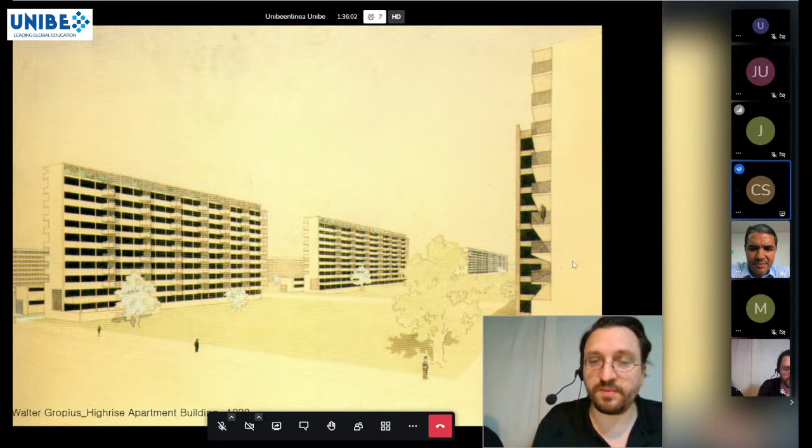I feel like it's a more functioning democracy than actually in Europe, where we're now running into problems a little bit. And basically modernism kind of won in Seoul. This thing you have on massive scales, like 60% is living in this environment.

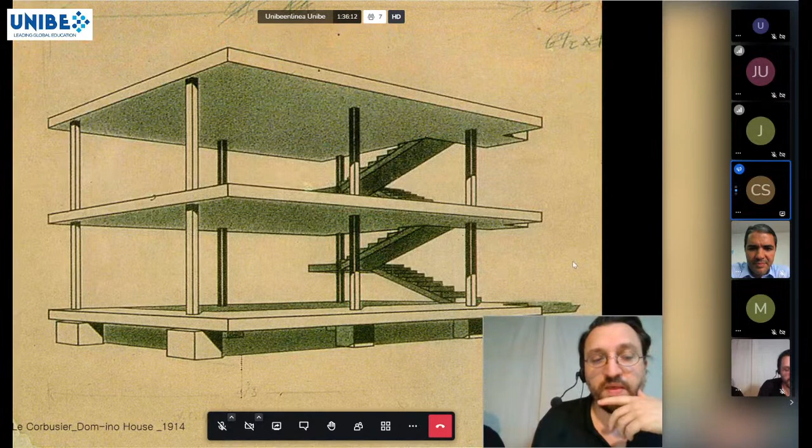Then the other prototype for modernism, Le Corbusier — in Seoul, these 4 to 5 story buildings are based on the Dom-ino idea in a clarity that we hardly have in Europe. This building system is so simple and so efficient, and everything in Seoul is about efficiency, speed, building quickly, tearing it away again, building again new.

And this is for me a typical scenario, like there's a Le Corbusier in front of a Walter Gropius, and the whole city is basically based on this concept.

And we want to quickly read a short text on how we perceive the city to explain what makes it so extreme. We call it a love letter to Seoul, because Seoul is so absurd that you either love it or hate it, and we got to love it in its absurdity.

Designing and discussing architecture in Korea uses the same terminology as it's used in the global discourse. But looking closer, these terms have a very specific and far more radical meaning in the Korean context than their Western implications. Put in other words, what we know has no relevance in Seoul.

It is detached from the building itself. The value of the building, in contrast to the value of the land, is so low that it has no influence on its very right to exist. A small plot costs $1 million US dollars, but the building that is built on it costs maybe 200,000 US dollars.

The quality of space becomes not a question of relation between different spaces, but an abstract idea of space in relation to itself. So space is only concentrated on itself in a building, in an object, never in relation to the street or to the next building or to a notion of public space.

This is for us a very typical scene: basically all interiors in Seoul disconnect themselves from the outside through these screens, and form.

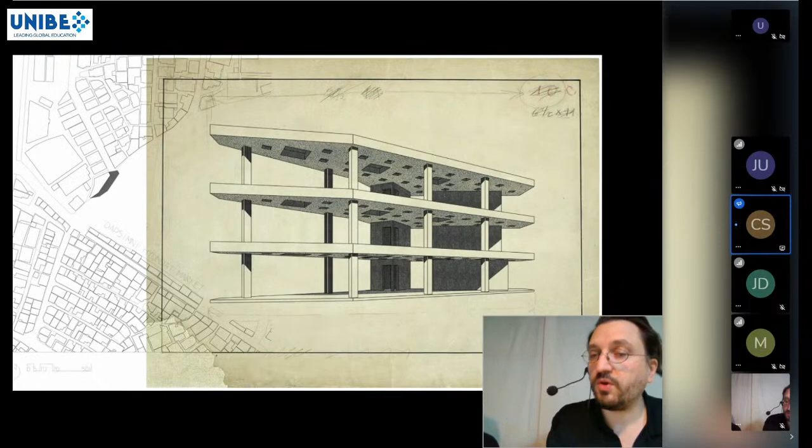So we are basically working in this little dot on the lower right - we are working deep in the unself-consciousness of Seoul. I want to show some quick examples of how we react to this, to this impossibility to actually do architecture here - like a neighborhood facility building where we really go on the Dom-ino house, that is just an empty structure that then can fill in whatever happens. Whoever wants to, whoever will rent it, will actually build their own shop or will build their own office in it.

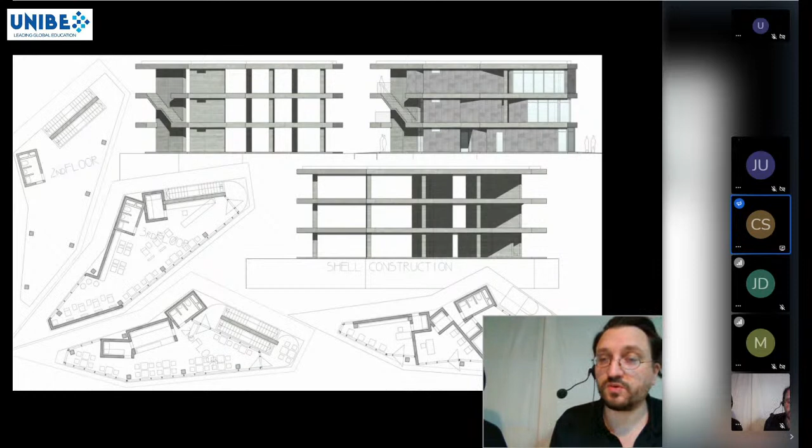So really empty shells that then basically are programmed to whoever is renting it. And a shop lasts basically in Seoul like 3 years. Then a new shop comes and then everything is changed again. And therefore we reduce basically just to a structural frame, or a competition for a kindergarten in this apartment complex context.

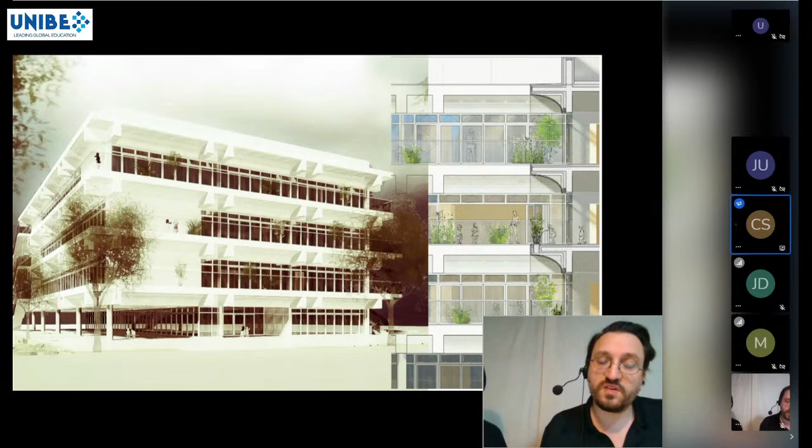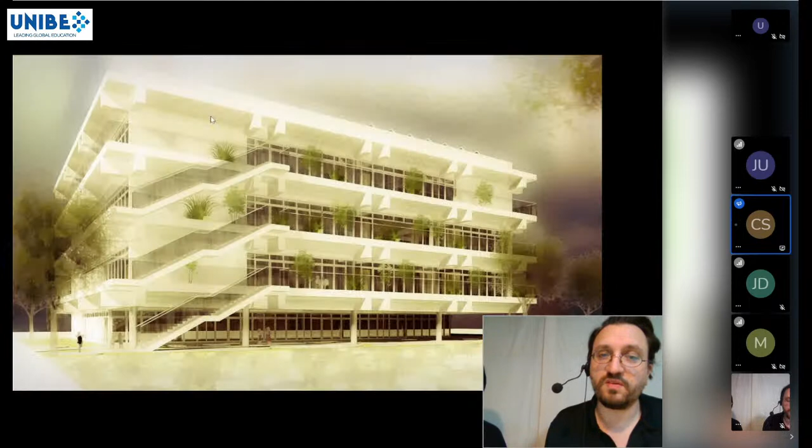In this generic city, where the program is highly compressed, we try to find principles so that the functional zones still have the largest possible space to breathe in that sense, but from the outside it looks completely generic - with the hope that it will grow over time and actually excludes itself again from this generic communication in the city.

Very often we are confronted with really low income housing, where we then have to get inventive.

This building was usually a single family house, costing like $300,000 in Seoul to build. We had to manage for our clients to build it for $90,000, where you then have to become inventive, and then the house will only be used for 10 or 15 years.

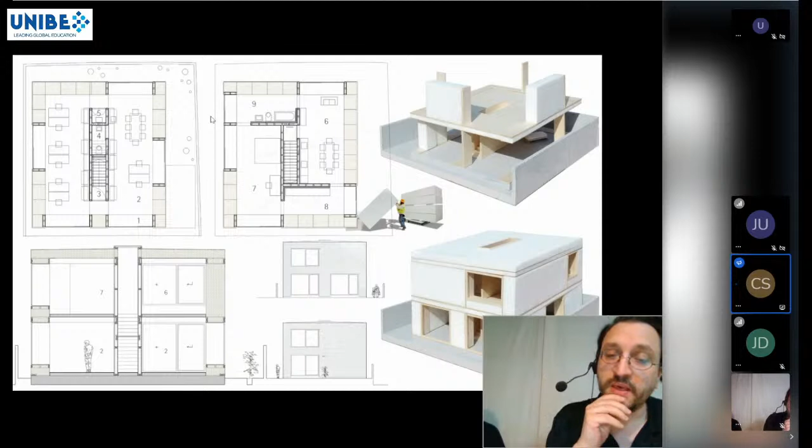So this was built on the principle to actually use structural EPS, structural insulation that is used for under-road construction, underneath roads. So the whole structure system is actually just an insulation block that forms the entire structure system.

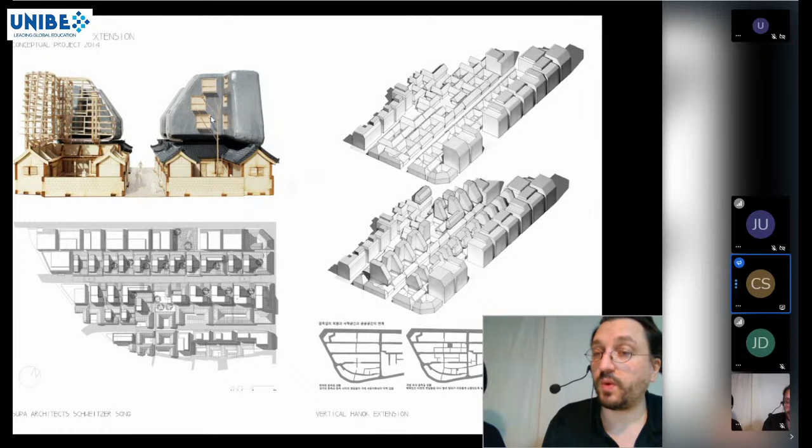Other reactions deal with these Hanok neighborhoods, the traditional Korean houses that are disappearing at an alarming rate because they are not monument protected or anything. So they're just disappearing, replaced by gated apartment communities, where we tried to develop systems that can adapt to the spatial needs, because they are taken away and a 4-story building is built on the site, or the whole area is taken away and an apartment complex is built onto it. Like systems that can actually plug into this Hanok and extend it, and therefore give an incentive to actually preserve it for the city.

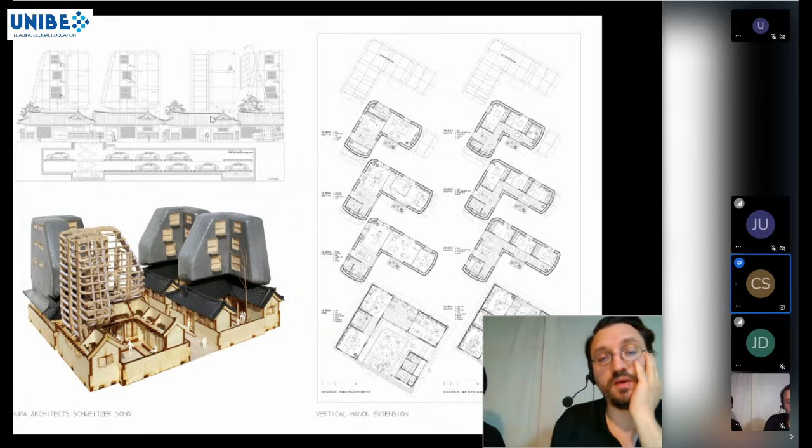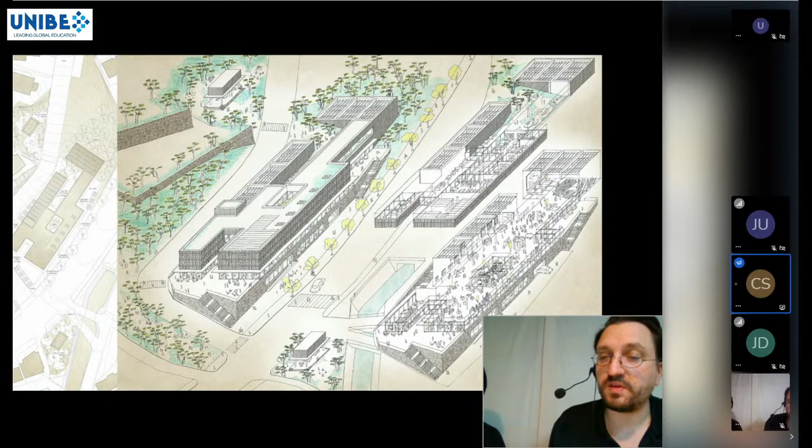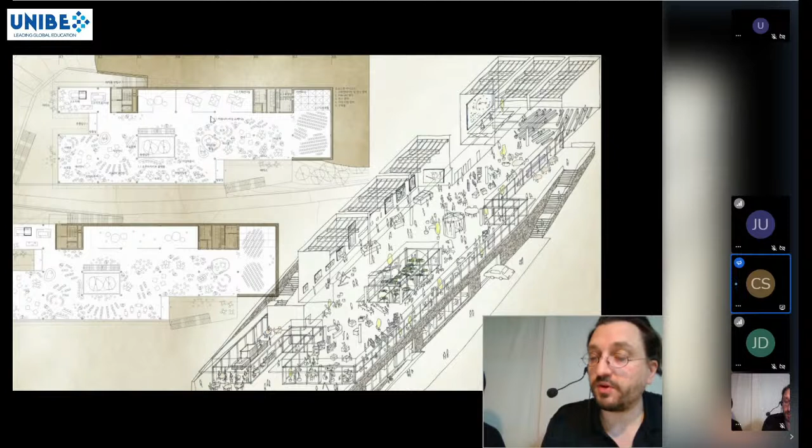With understreet parking systems, cultural centers that stay completely undetermined, that just give space to let happen whatever will happen, because we know in 5 years something very different will happen. So if we now define very precisely which function is where, in 10 years it cannot be used anymore. Basically a culture center that is just one big open space where auditoriums can plug in and exhibition spaces can plug in, and the whole activities within the space can change.

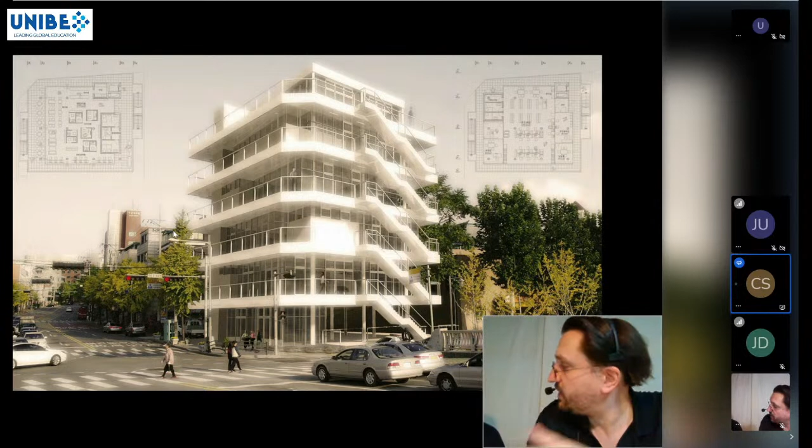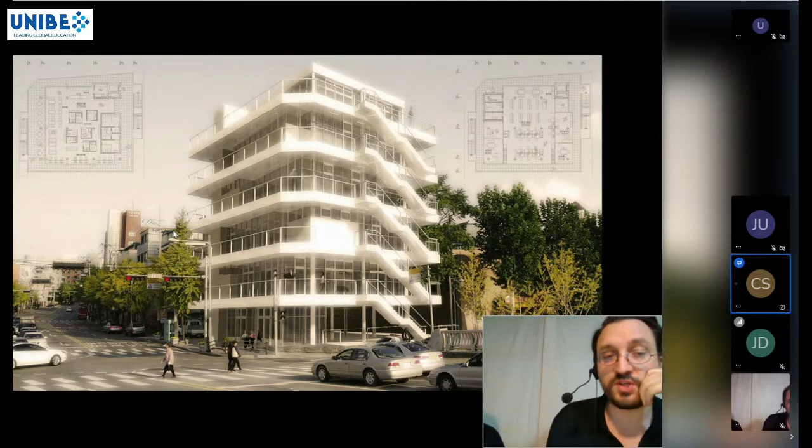This is called community neighborhood, community centers, community neighborhood centers, where again we tried to invert the building, so it becomes the Peter and Alison Smithson's street in the sky, where the street is basically brought up into a building, where the functions can exchange and still work and operate with this constant change. We are big fans of Team 10 and Peter and Alison Smithson, and therefore we mostly work in these very local small communities and neighborhoods, taking a lot from their philosophy on how to view a city, to see a city on its different scales, and to try to connect these different scales.

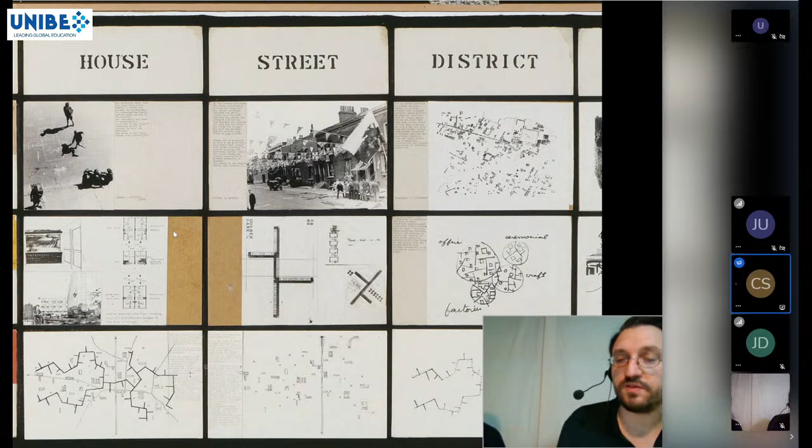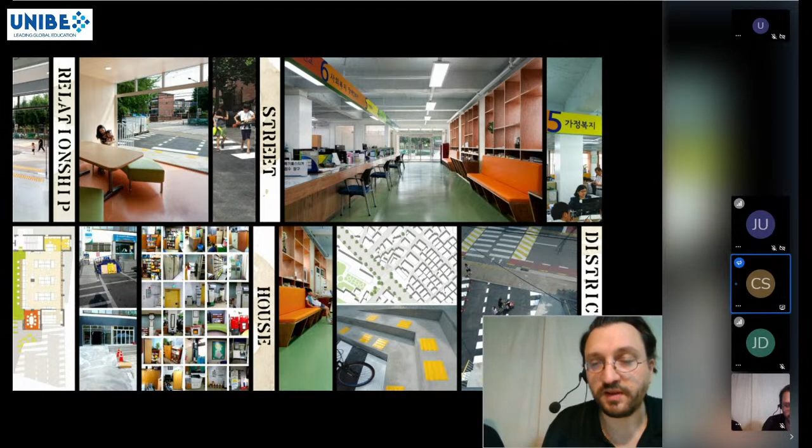This is a renovation of one of these neighborhood community centers that are really vibrant and really important for these local communities. They were basically built mostly in the 1970s. Again, a modernistic block just put here.

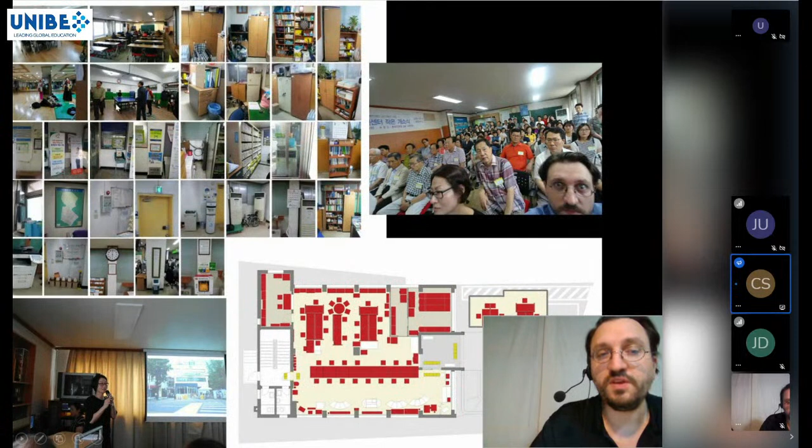On the ground floor, you can get your birth certificate there. If you need any official document, you can get it there. In the basement, they have senior activities like table tennis for senior citizens. On the second floor they have a lecture room and a library, where pupils can come and do their homework. Then on the third floor they have community spaces where they do traditional dancing or yoga classes and these kinds of things.

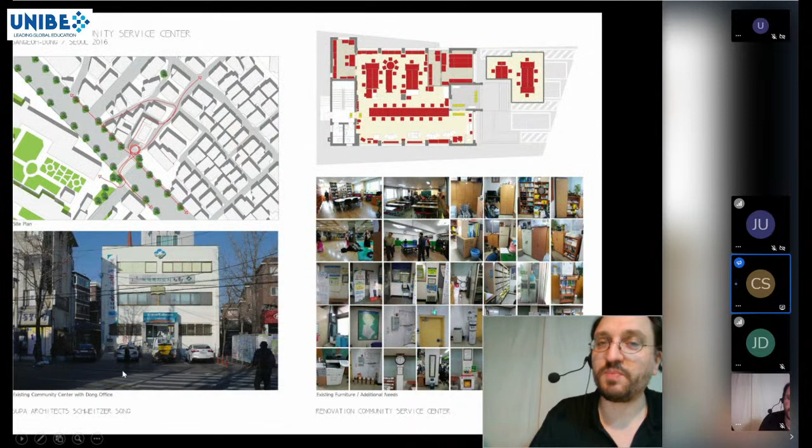So they are highly essential. They look really bad, really bad, but they are highly essential, and they are in dire need of renovation. But then for these kinds of tasks, there is no budget, and we love to do these kinds of projects because there is no budget for it.

But there we can work very closely with the local community. This is a photograph from one of these community meetings, where everybody comes, everybody wants to know what happens with their community space, and they give a lot of input.

In this case, the task was basically: you enter here through the windbreak, then here's the service area where you get your documents, then you go back into the staircase where you go up or down to the community functions, and then there's the back entrance.

Through long discussions with the locals to understand their community needs, because every community center has different needs, we mapped what they all have. Basically everything that is red they want to keep, they still need. But then the task is to add this program into here, and you see, how can you add this? There is no space anymore for it.

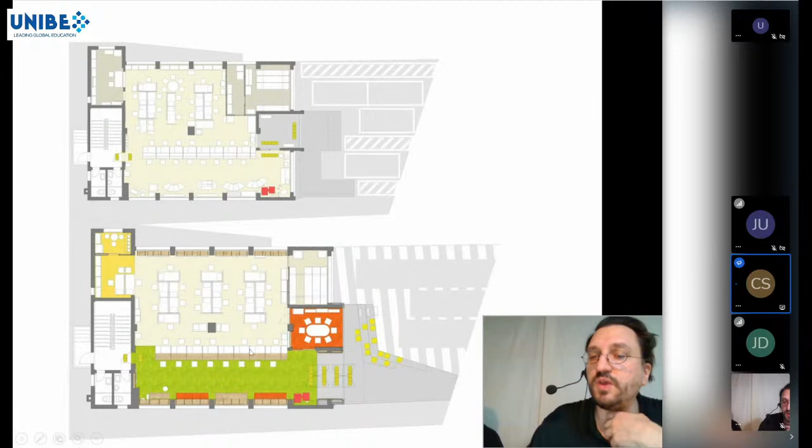Everything is an object with this strict boundary, expanding to the public space. You see the new established relationship between an outside community space and inside community space, the ramp that goes in.

This is now basically linking this object that is very defensive, linking it to the city, opening it up to the possibility to extend to the outside, and therefore also taking the pressure from the inside of the building a little bit outside.

You see how it works extremely beautifully, how they discovered their outside space, and now do neighborhood festivals outside, using this little stage towards the community space for extended communication.

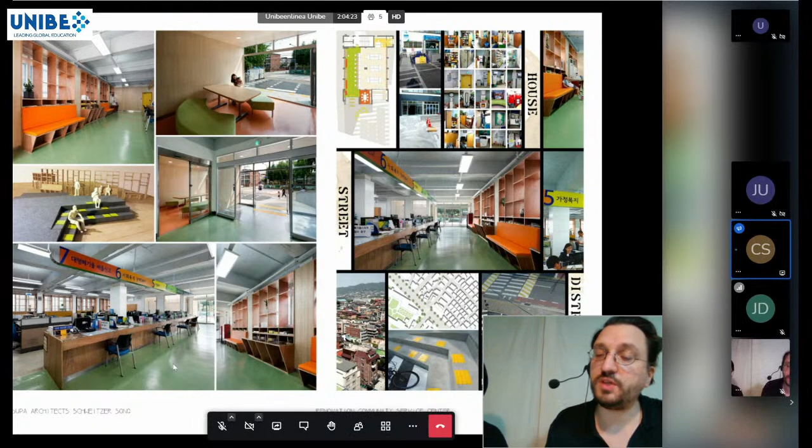Also inside, to provide shelves where they can put all the stuff these community centers need inside, but almost no structural change, almost no design—trying again, very low budget, just reorganizing the necessity of the local community and strengthening it to make it possible to happen.

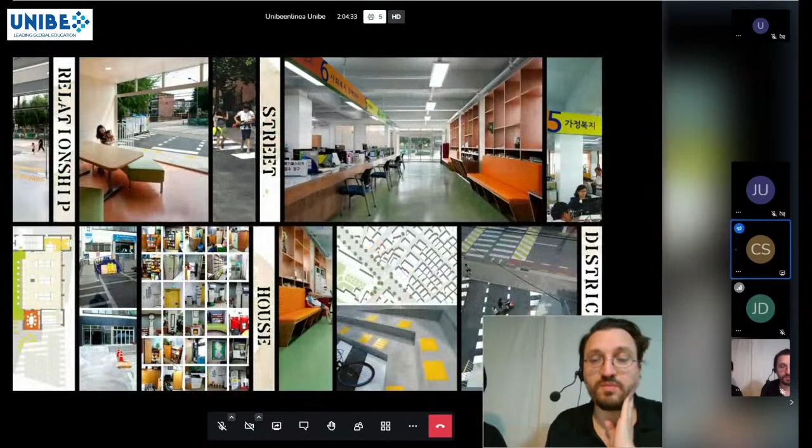These are some photos, some images.

To show another example of what we learned, or had to learn quite drastically: as architects we design a building. We have a client, the client has certain needs and wishes, so we come up with ideas.

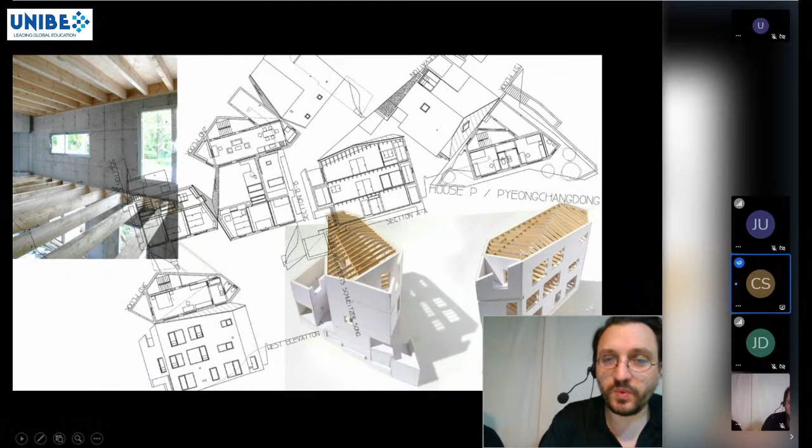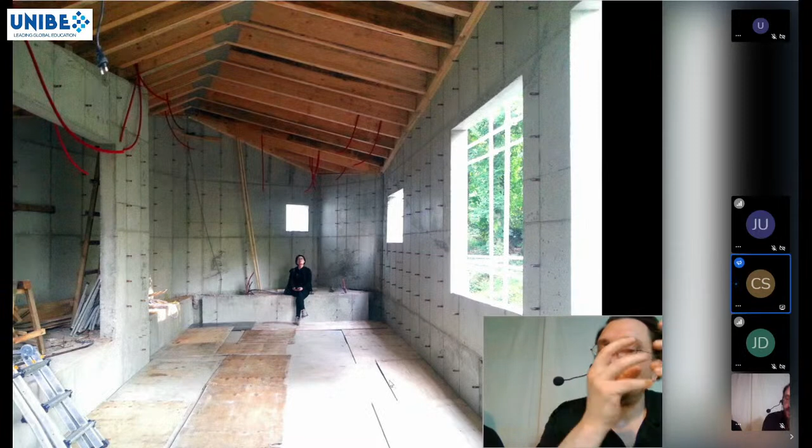We as architects dream up, we communicate through models—this is a structure model that we built. We draw plans, we make details, but how do we actually know that what we design then works?

This translation of the design idea into reality—there comes a moment on the construction site when suddenly the space emerges, when suddenly this is the first time we actually see that what we planned might work, that it might be a good building or not. It takes quite a long time to reach this point.

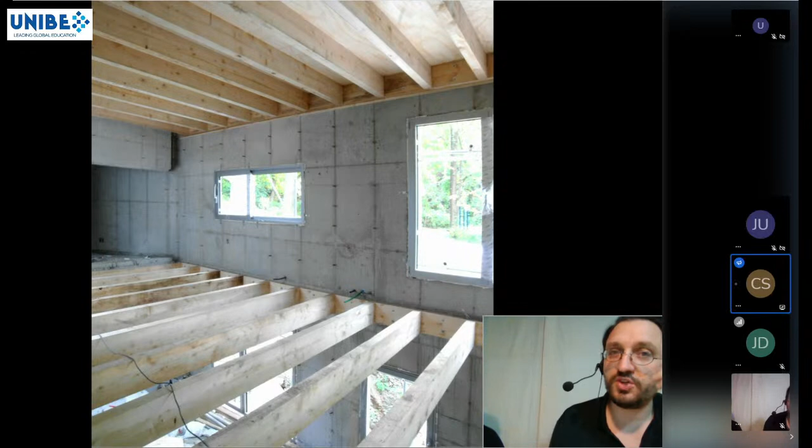Again, the cheapest way to build in Seoul is concrete. Brick is much more expensive than concrete, wood is very much expensive, concrete is the cheapest way of building. So again, with a low budget, it's a concrete structure, but at least we try to bring in wood, material that makes a house a little bit more lively through the roof and the floors.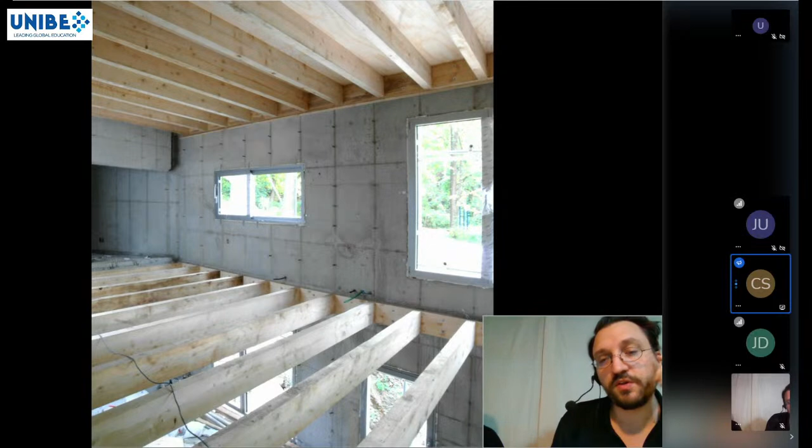Then the architectural photographer comes, somebody else comes and documents your work. You see here the 1960s, 1950s houses that are now taken away and replaced with newer, higher houses. It's actually a quite beautiful site with a lot of forest around.

For these kinds of buildings, it became very unimportant for us to do anything that represents, that says 'I'm a single family house' or 'talking architecture,' because it's just not necessary for architecture to have an identity. It's almost like the famous novel from the Austrian author Robert Musil, the man without qualities—we started to build houses without character that deliberately try to have no character.

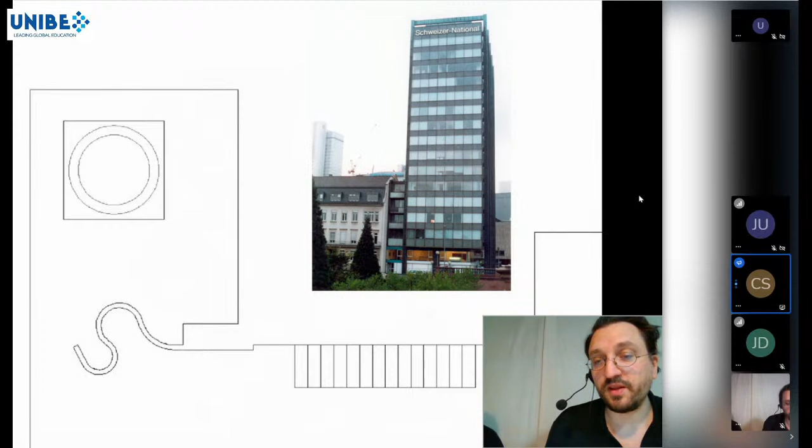To quickly show, this was our very first project, in 2000, when we graduated from university—it was an office renovation on the second floor of this high-rise building.

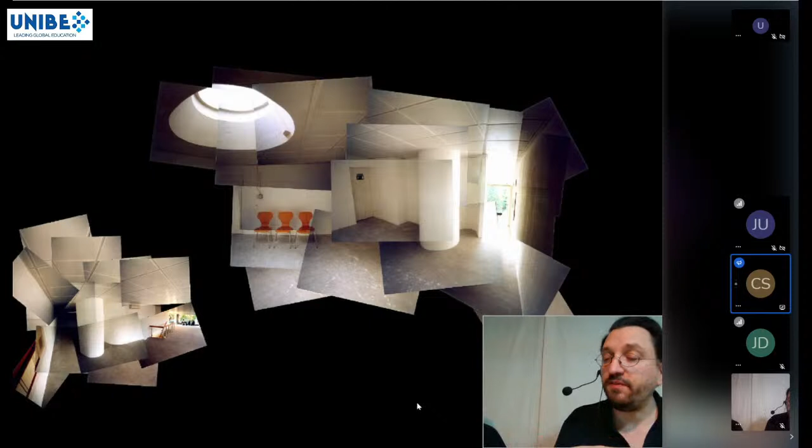Basically, we just had to build a wall from the office to the tea kitchen, and we built this strange wall here, where then the architectural photographer comes and makes this image, and that freezes the architecture into an object, while we prefer to look at it this way, that you see the relationship between the intervention and the space, where you feel a notion that it's not about the wall, it's about what the wall might influence, how people use the office, or how this might influence your behavior within this tea kitchen and office space.

And therefore, we ask an artist to take photos of our building. A different view, not this curated view of the architectural photographer, but somebody who doesn't want to represent the building.

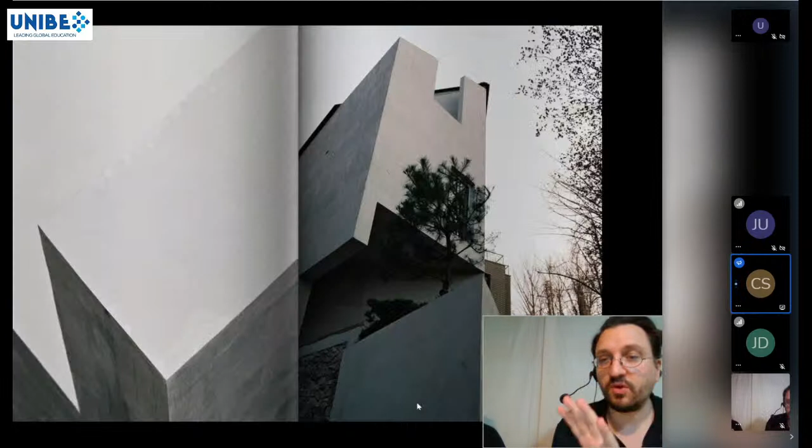His name is Hee-chon Kim. He's meanwhile a quite famous media artist in Korea. He expresses his art through film and through photography. And he made these images that are zoomed in, that look at details, that don't show the object, but that show the spaces, and maybe also the absurd spaces and the unusable spaces, and how the building relates to the outside, the reflection of the outside within the building.

And we like these photos much more. For us, they represent more what we are trying to achieve, that the house becomes a place to live, and becomes a canvas for your life, where how it looks like doesn't matter anymore, but it has to have the ability to allow life in it, like these strange incidences in the house, and for us this much more represents the essence of what architecture has to do. Since then we let our photos be taken by artists, not by architectural photographers.

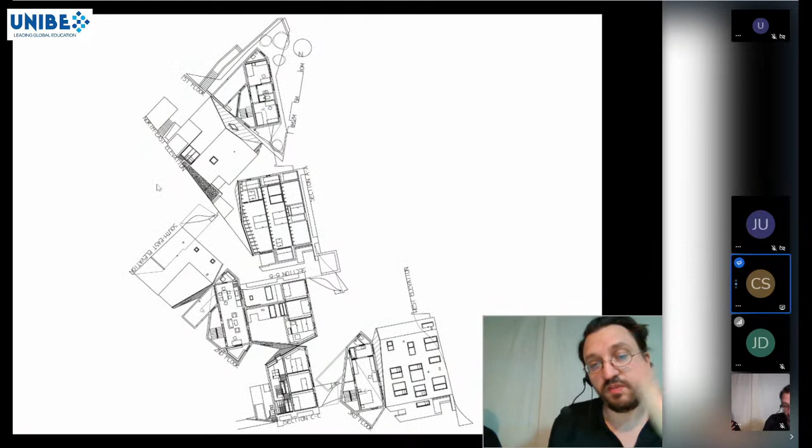Like we trust this view more to convey a spirit of our buildings. And then in this case, something very interesting happened. The client, the husband, is a journalist, and the wife studied Buddhist philosophy, and she's a writer. She has a blog where she writes articles and reads books and does book discussions and so on. And on her blog, she then started to publish photos that were taken in this house.

These are the execution drawings of this project, like 105 pages of plans, and for us architects, this is actually the most time we spend on. We look at it day in, day out. We never see the space until it's realized. So how do we know whether our design can achieve becoming a home?

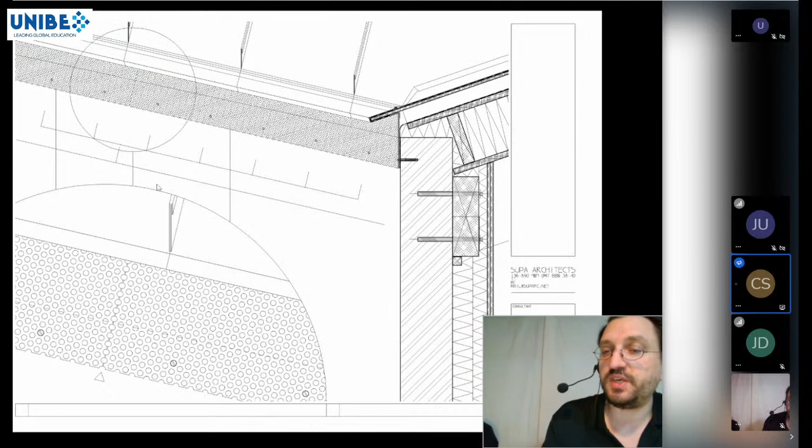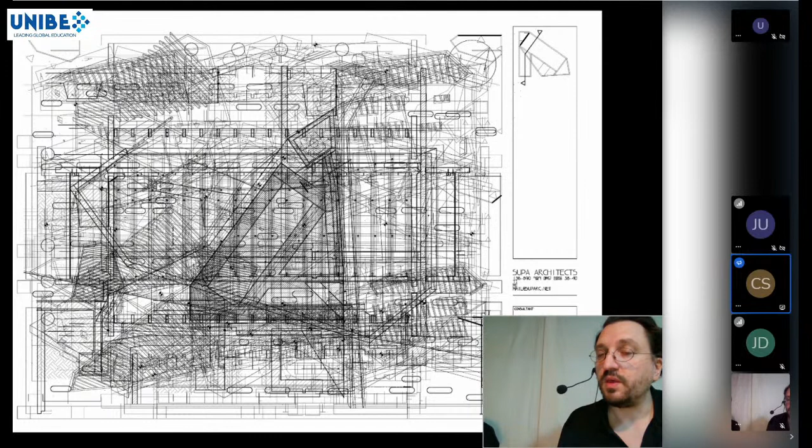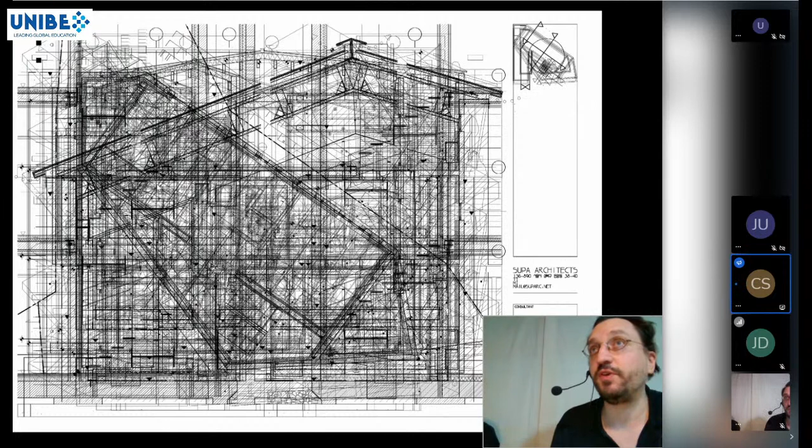That can achieve that life can happen in it. For us, we started to overlap our execution drawings to see how complex our design is, to test whether our design is too simple. If it reaches a certain level of complexity, we know we've reached a point where it's still a simple design, but it will allow a lot of different kinds of use, and adapt to the user and the changing life of a user, when the children move out, when one grows old.

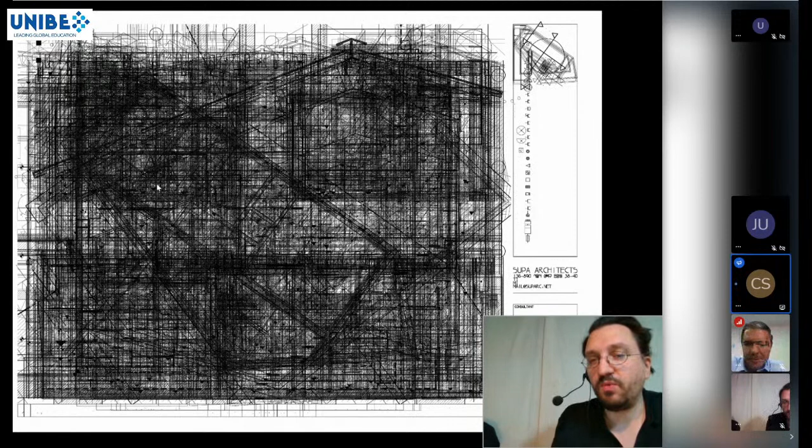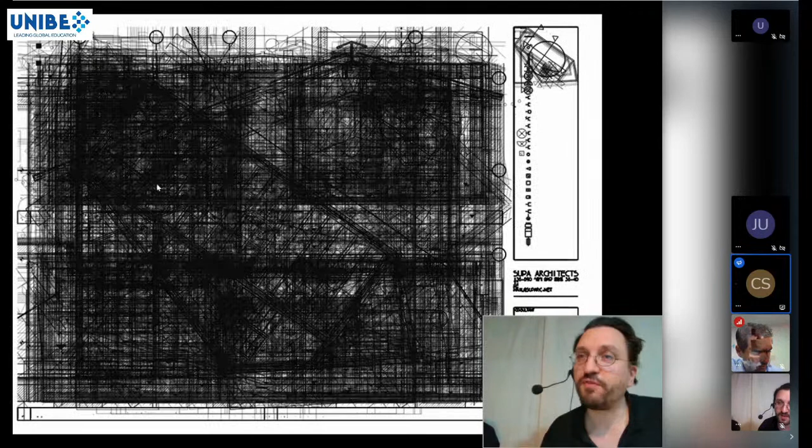So these are, let me jump to this: the overlap of all 105 plans, where you cannot really read anymore what the house design is, but we know for ourselves, if our execution drawing reaches this complexity, the house will be good. It became a different kind of language. You see it here animated. I hope the frame rate is quick enough - probably not - showing how this execution drawing densifies more and more.

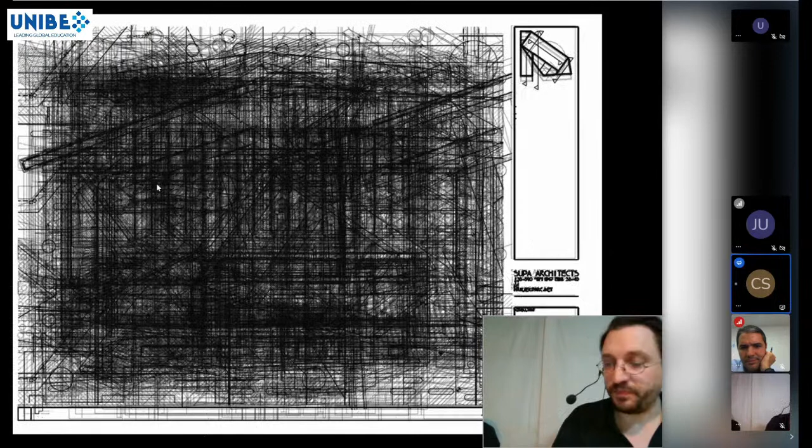And this became for us a principle, basically, to test whether architecture is successful or not.

Now my question would be, how much time have I got left? Can you give me 10 more minutes? Then I would talk a little bit about the Venice Biennale, or shall we? Yeah, sure. I personally am delighted to be part of this conversation and to learn everything you are sharing with us, so please serve yourself. Okay, then give me 10 more minutes please. I know we are already at 1 hour.

I wanted to, because this is now what kept us busy for 1.5 years - this damn Venice Biennale that was delayed 2 times - so this is our most recent project in that sense.

I think the Dominican Republic is represented at the Venice Biennale with Lydia Leon, who made these very beautiful collage paintings in this church. It's just breathtakingly beautiful how it looks, with the tobacco leaves, right? I think it's the second time. Oh, it's the second time. Okay.

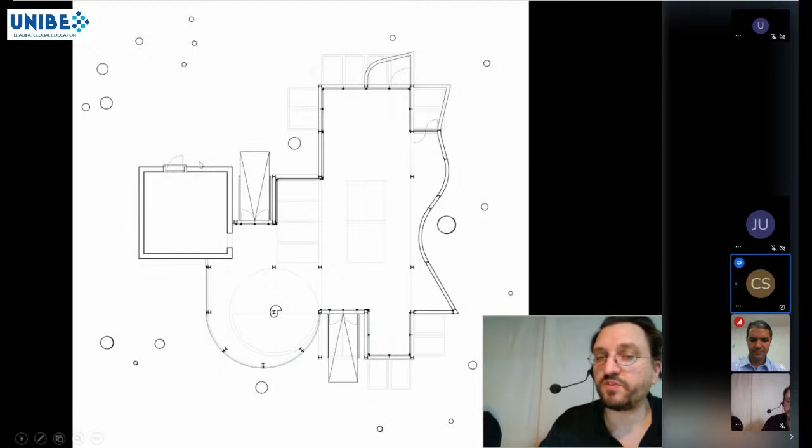Now the task was how to bring a school into this space. What does a school need? This empty space you see on the left is actually an old office, a brick building that later became a public toilet within the Giardini, and the Korean pavilion just docks onto this historic building.

So what makes a school from an architectural infrastructure? In Seoul there are a lot of community spaces where children can do homework, or that you can rent for an hour for a seminar or lecture. Basically all you need for a school is a table, a board, a shelf. In Korea you need air conditioning because it's very humid in summer. Just very basic infrastructure.

But of course we could have just taken all this and shipped it to Venice. Instead we started to look at the essence of architecture, what it takes to come together and discuss things, and we looked at this famous photograph by Manfred Schiedhelm of the Team 10 meeting in Bonnieux, France, where Team 10 met in the shadow of a tree.

You see a stone table with coffee, a natural stone wall. On the left down here, that's actually a building, taken from the second floor. We started to analyze it, cutting out the people to see what makes this space so essential and so simple. What is the mechanism behind it?

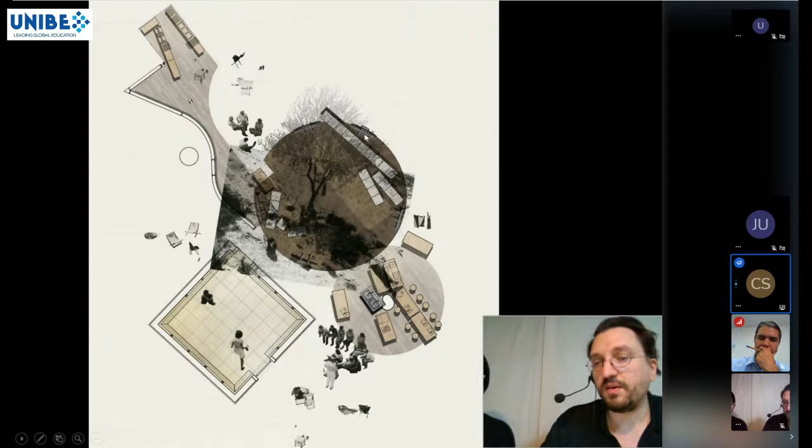This was then our concept collage: for a school we need a gathering space, basically a bench and some chairs we can flexibly arrange for whatever scenario—a lecture, a seminar, whatever it is. Then we establish a kitchen where we can cook and eat together, because food is the most essential social communication tool of all.

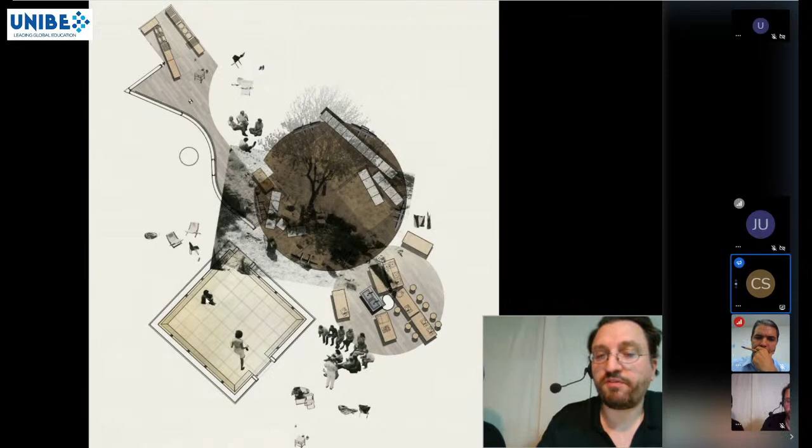Then of course a storage where everything you need can be stored away—you take a table, you store the table away again. And then the house that appears in the photography, just as a small hint. We also wanted a rest space, because when you do the workshop all day, you need a little bit of privacy for 20 minutes and to charge your cell phone.

This is then the pavilion design, with the central gathering space, the workshop area, and storage where you can put the tables—they can go into storage or come out. This is the kitchen, also flexible. On the roof is the toilet. And in the old brick building, we put in a Korean paper floor as the rest space.

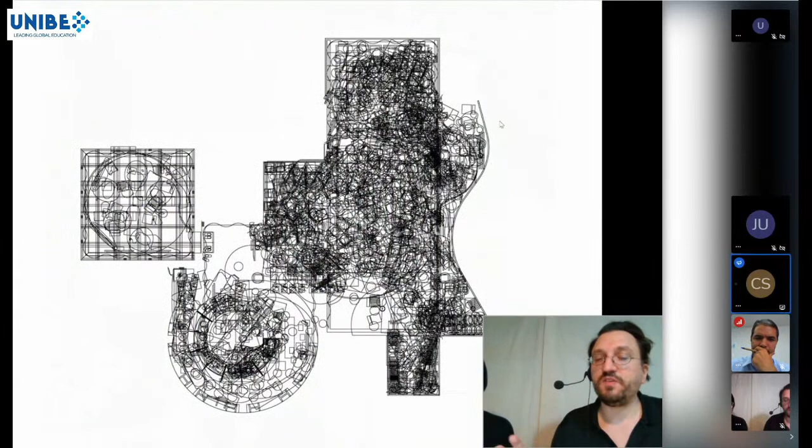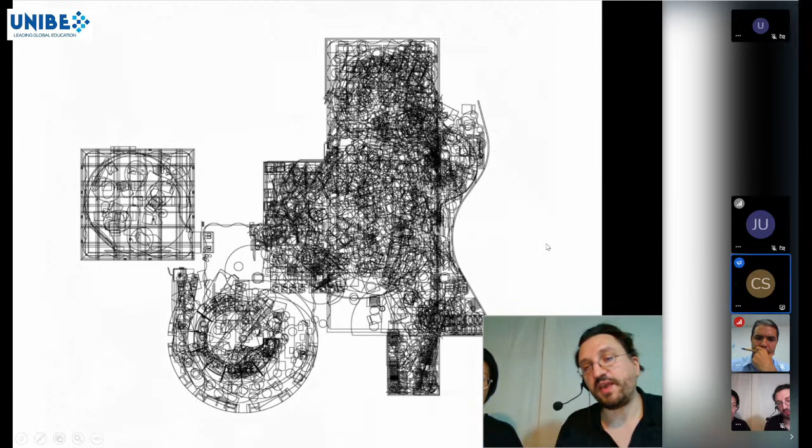But we hate this, because this is now a communication tool frozen in time. We like to show it differently: this is an overlap of all the scenarios we drew, all the possible placements of tables, all the possible arrangements of how the workshop can happen, maybe a seminar in the rest space. For us, this represents the essence of what we are doing—not a frozen moment in time that never looks exactly like this, but how it will actually appear.

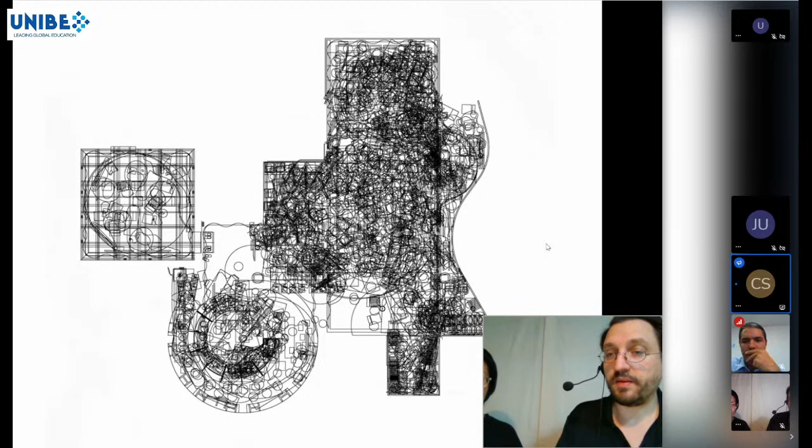If I take all the 6 months together, this is actually the representation of the pavilion, and not this one. And this is now how it turned out.

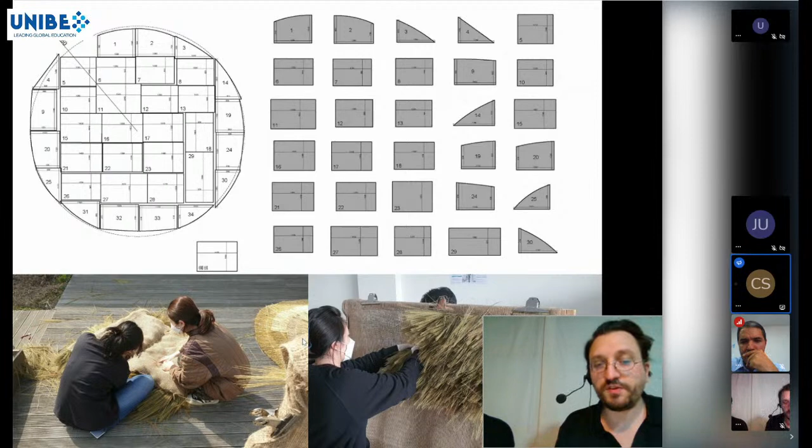Kim Ion, a landscape architect, developed this amazing carpet out of weed, like what traditional Korean brooms are made from, dried weed, that is then woven into a net. This was in the autumn of 2019, when we produced this to send it to Venice. Now it's here within the space.

Then you see the benches. Back here is the workshop area. Because of COVID, the first workshop will happen mid of this month. The first student will come, I think, from London, and do the first workshop there.

So then the place will start to change, and they will rearrange the tables however they need it. Then here in the back, we have a pin-up wall. This was not just for the opening, but whatever the students produce goes here for pin-ups and for discussions. Here on the right is storage where you can put your things.

Our kitchen that is fully operational, very well equipped, very essential in Korea. The rice cooker, to cook rice, and then the paper room with the Korean paper called hanji.

It's a traditional technique, 4 layers of paper, and then varnished with oil stain, soy oil as oil stain. Here you see how they applied the oil stain. It's a very fascinating floor that you only find now in traditional Korean houses, so very seldom. It's not done very often anymore because it has to be redone every year.

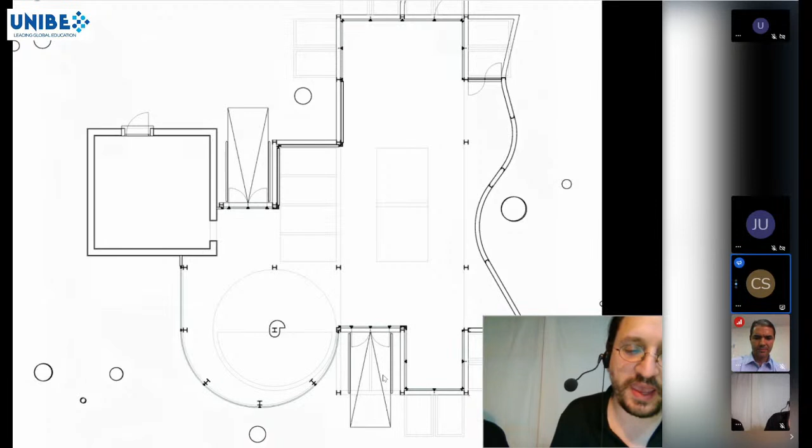So we really like this relationship, because we didn't want to do something to look at. We wanted to do something to use, and therefore the architecture becomes a relationship, a process, a mutual influence, an interaction, a social enabling. Basic functional needs, like a good working environment, adaptable to any given space, adaptable to any scenario of use.

The plasticity is a term that is important for us. The user can influence the space, but the space also influences its use back. It's a dual relationship: the user can change the space, but the space also influences how we use it.

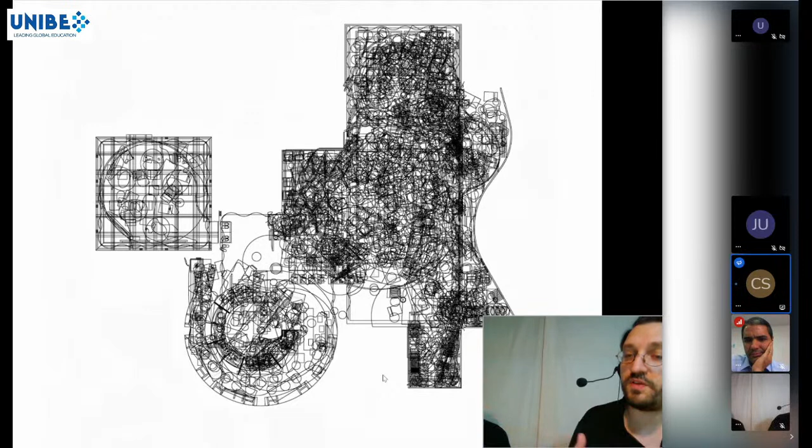All these principles are realized in this scenario, which actually has only one fixed space, the gathering space, the grass carpet. Every other space is unfixed, can change, can evolve. Maybe to close with the future school manifesto that we wrote, which expresses very much what we believe architecture should be or has to do.

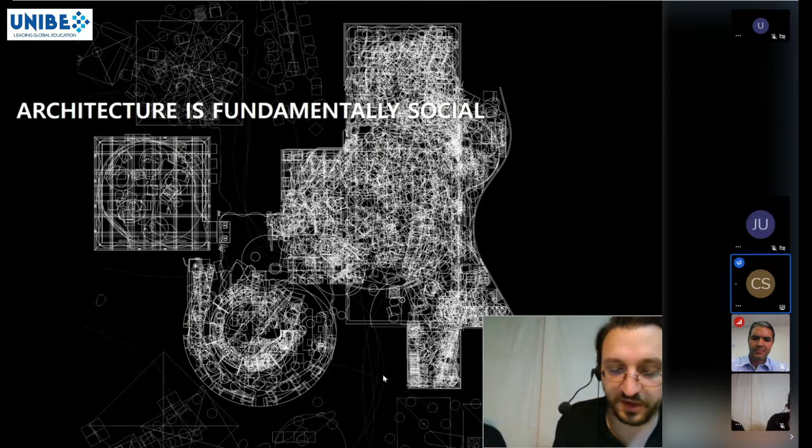Architecture is fundamentally social. Architecture is by us all, for us all. This is a quote taken from Team 10, right? It shapes our lives at every moment of our existence.

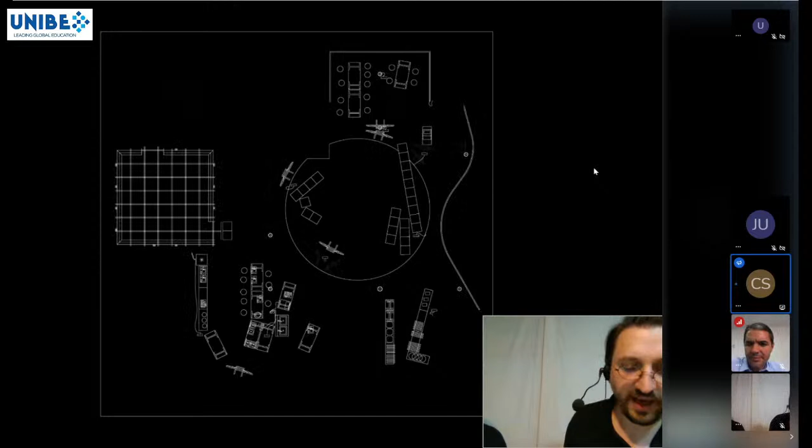Therefore, architecture is not appearance, but content. Architecture is not economic, but humanistic. Architecture is not building design, but social design. Architecture is not object, but relationship. Architecture does not begin nor end with building. Architecture does not exist to function, but to influence. And architecture does not exist to organize, but to provide opportunity.

So we are not organizing space, we try to provide opportunity. Architecture does not exist to serve, but to enable.

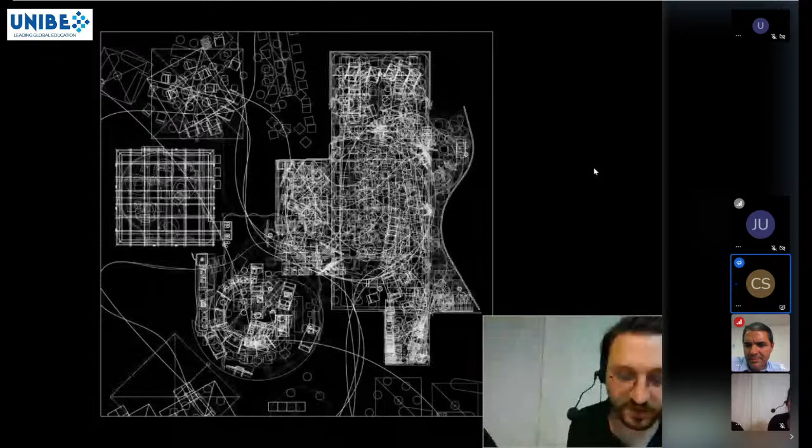Architecture is a cultural act, but architecture is also a political act, and it has to be seen as such to develop its full potential. We have to be aware that we do something political, something social, and something cultural. We are not just building a building. So architecture is a process, and not a result. And all this makes architecture fundamentally social for us.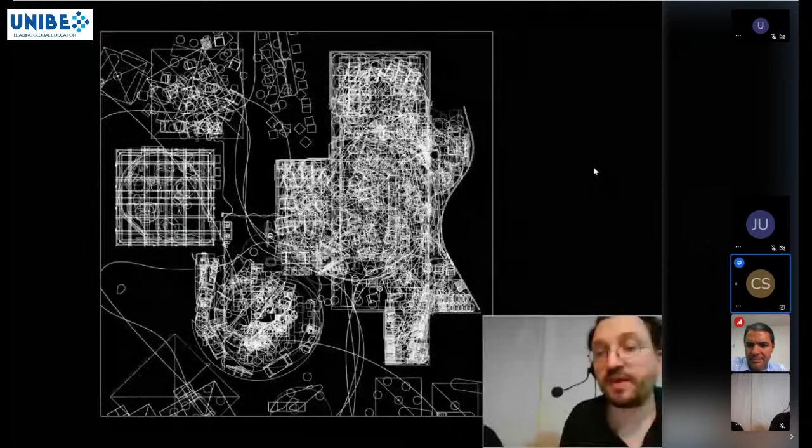Architecture is fundamentally social. Yeah.

Will and Christian, it's been amazing to follow you guys on this journey that started with a discussion on the current state of affairs in Seoul, Korea. It caught my attention how fast the city is transforming into a seemingly lifeless appearance or zeitgeist. I was recalling architects from the 60s and 70s in Japan, Tange and Kisho Kurokawa, who proposed discourses on cities that had to be metabolistic, and buildings suitable to transformation upon the emergence of new needs within the building and the city. It struck me that something often quoted as an advantage and a virtue, such as adaptability, could also have a dark side.

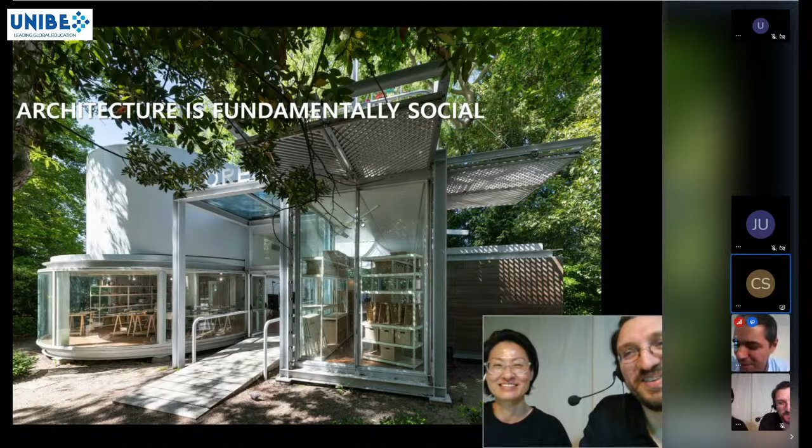You better come, you better come. Now you have Africa, Arabia, Asia, everywhere, but this is not easy to get there. Kind of, you better come, you have reasons to come now. You have family here, a new academic family, new friends, and we can share some great hot Dominican coffee in the morning while we do some exploration in the city and other interesting spots in the country. So we will wait for you. Let's hope the pandemic allows us to do this.

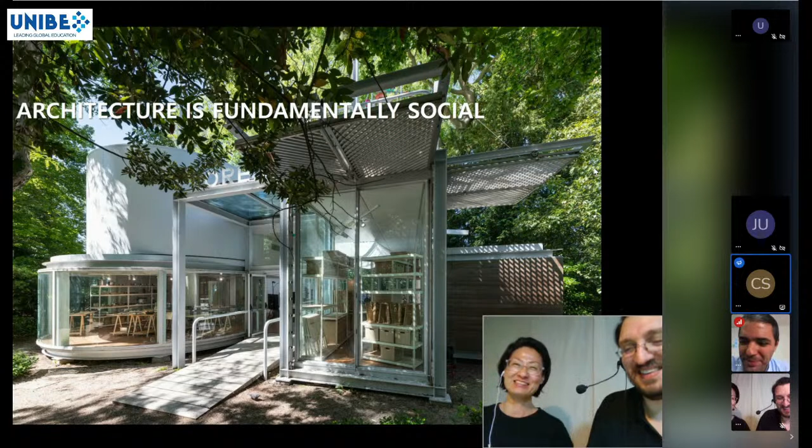Thank you very much, thank you again, and hope to see you soon in Venice, maybe next October. I hope so, we are planning to come. So our first coffee will be in Venice then. Yes. Okay, take good care, have a great night. Thank you, bye.